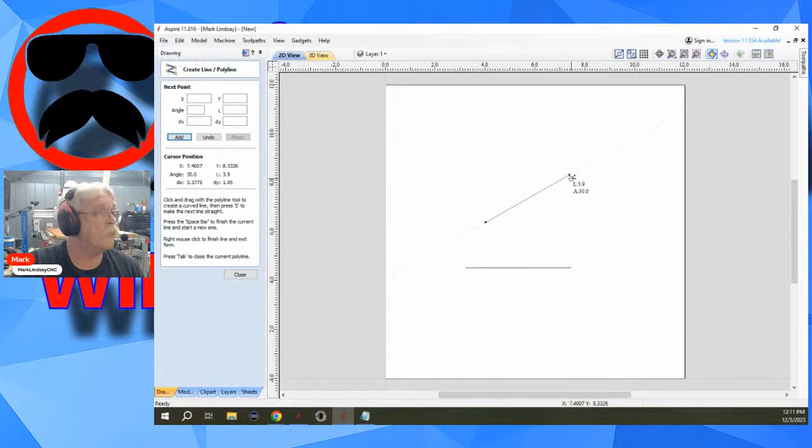Maybe it's something I'm not doing right, but I tried them identically in version 11.5 and version 11.0 and got the same result. So let's do, what did I say, 26 degrees - it's not urgent that I be right on 26. There's 26.4, close, and select that. Rotate - my rotation center stays the same, and I want an absolute rotation, 88.5. Apply - and again, it flips it.

It does a relative rotation. So I'm going to bring up both topics with Vectric, to see am I doing something wrong, or am I doing it backwards or something to that effect. So that was the gist of the follow-up, in that we weren't necessarily doing anything wrong - we just found a little bug under the hood. And so I'm going to try to get it taken care of.

I will update you when I get a reply. But again, I've got to make a short video - I just haven't gotten that far yet. It's been a busy 3-4 days. And as soon as I get an update from them, I will update you on possible causes and any fix that they come up with.

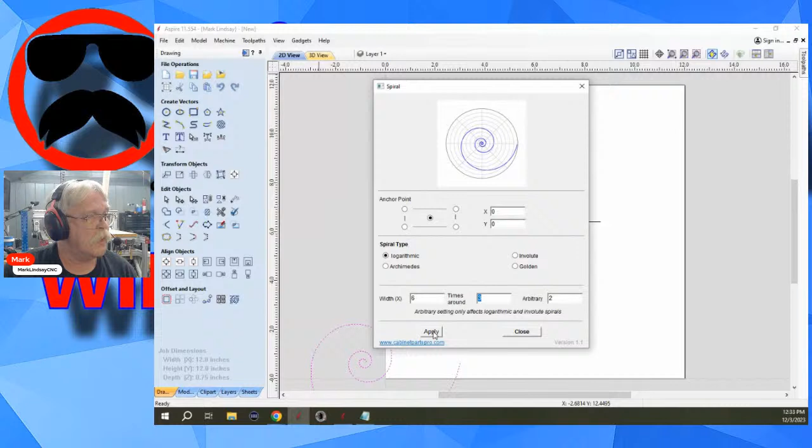But we'll go up here to the spiral gadget, and I'm going to create a logarithmic spiral. I'll leave this as it is, a 6-inch width wrapping 3 times around. We'll go ahead and apply, close that. Now I need to center that up on my material. So there we go. I have my logarithmic spiral with 3 wraps.

Now let's go into mirror, selected objects, and we want to flip about a line. So I'll have to hold down shift and select my line. And it's going to flip this spiral around the line. Let's see if we get weird results, Brooks. Nope, looks good to me. It worked. Looks good to me. Let me go ahead and select that, then we'll shift and flip it again. It seemed to work for me, Brooks.

I don't know what it is, but there have been times I have discovered in the last, I want to say, well, with version 11.5, I've noticed that certain things will suddenly stop working. But if I save the file and exit Aspire, then start it up again and load the file, everything works perfectly. I can't explain it. I don't know what's going on.

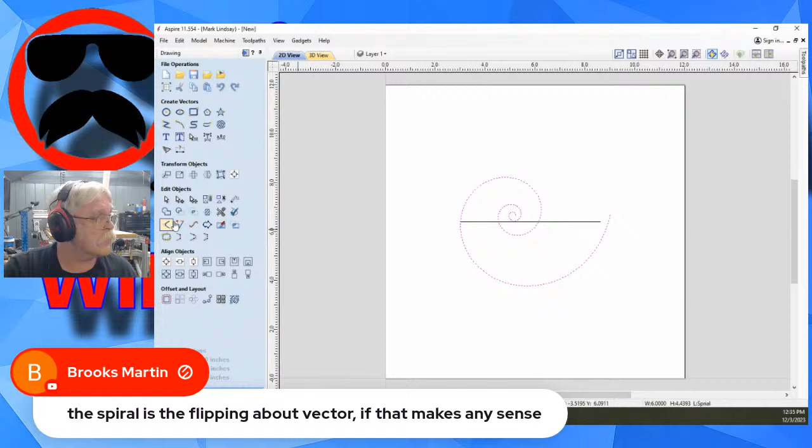Let's see, Brooks says the spiral is flipping about vector, if that makes any sense. It doesn't, sorry. The spiral, it worked for me. Well, let's get into the mirror. Now you said the spiral - do you mean the spiral isn't flipping about the vector? This is going to go vertical because my vector is horizontal. So if I hold down shift and select that vector, watch the center of the spiral here. It's going to flip about the line. The bottom of the spiral is right there.

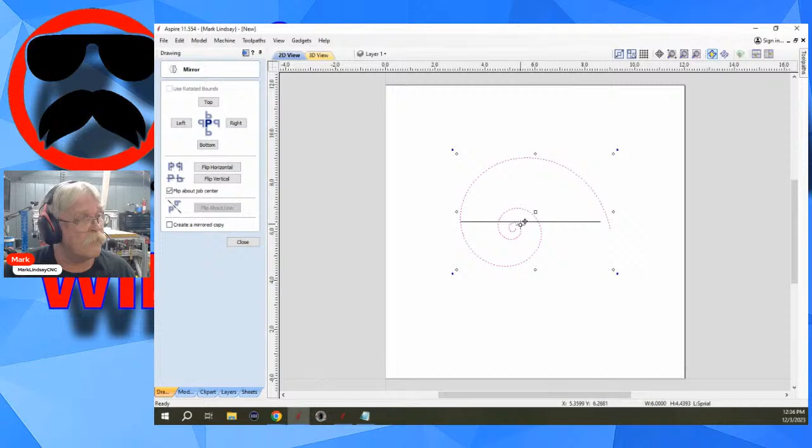Oh, it's flipping the straight line to mirror around the spiral.

What is your vector selection order? That matters big time. Let me close this. You have to select the spiral - that's what you want to flip. Then you have to hold down shift and select the vector

that you wanted to flip around. It's kind of like using a 2-rail sweep or extrude along a single line. You select, but it's backwards from that. You have to select the thing you want to flip, then select the thing you want it to flip about. Now, if you select the vector first, then select the spiral,

it is going to move the vector. But if that's not what you intended, if you wanted to flip the spiral around the vector, Control Z - you have to select the thing you want to flip, then select the thing you want it to flip about.

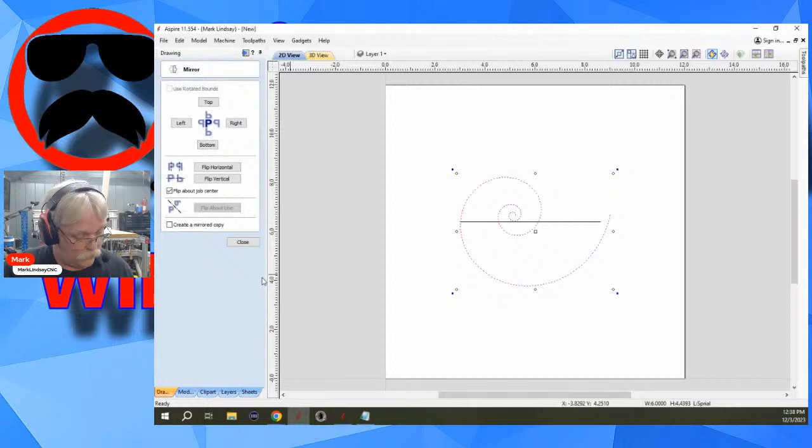It appears to me that it's working just fine. This vector is staying put. I can't say what's happening with yours, but

now, if you just want a copy, you don't need to use the vector. You can just flip about Job Center and create a copy.

But the tool is doing what it's supposed to be doing. I've been talking about my last demo.

The vector to mirror is a scalloped line around the spiral. Okay, I'm going to have to see the file. You're going to have to send me the file, Brooks. You're attempting to model a seashell. This is not something that I can do right now with you in the chat. You're going to have to send me the file and we're going to have to talk about it so I can see what's going on.

I see what you're doing. I see where you're going. You're attempting to model a seashell.

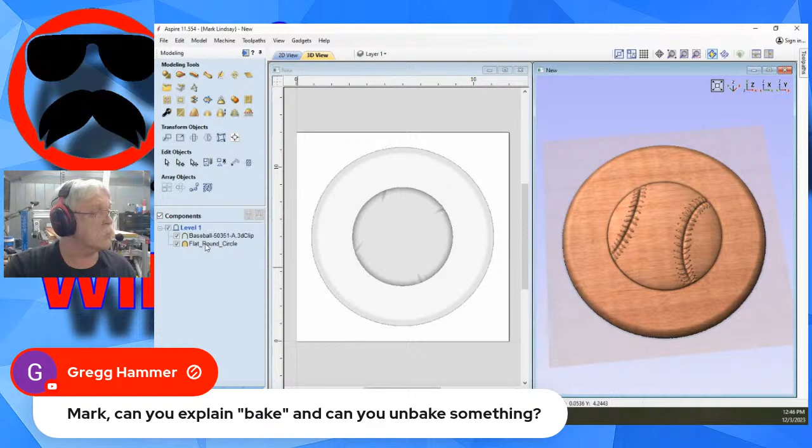Go into my modeling tab, and I'm going to split my 2D and 3D views. Now I've added my baseball on top of my flat round circle. Baking will take these two separate components and turn them into one single component. Let's select both, hold down shift, and go right up here to bake the selected components into a single new component. We click, and now that is one single component.

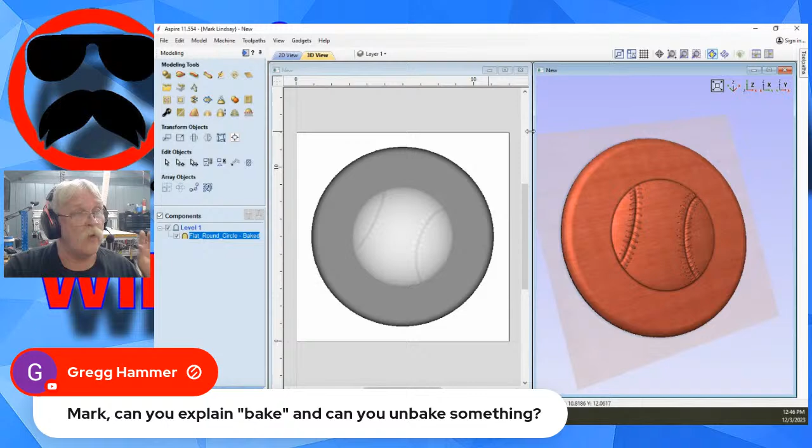Once you bake them, can you unbake them? Well, let's try. If you have it set up, you haven't saved it, you haven't closed the file, and you're still within the window of Control Z, it does work.

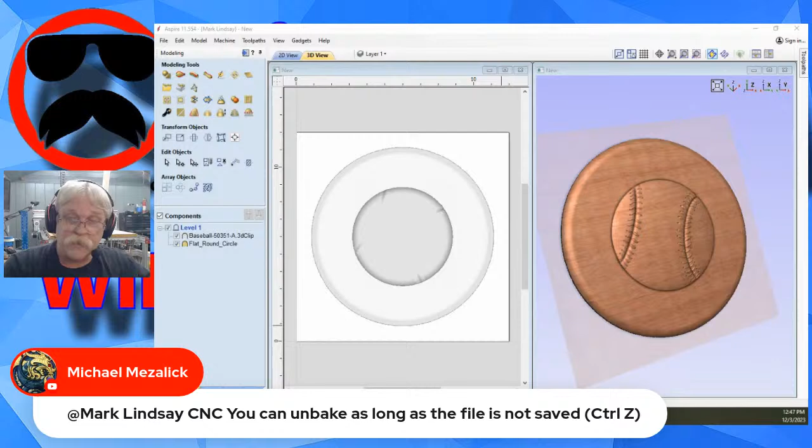And that's where Michael, see, you taught me well, Michael. You can unbake as long as the file isn't saved. But if you have saved it and gone on, it cannot be unbaked. I think I know what you're talking about. I got your email, I will get back with you just as quick as I can on that.

No, once it's baked and it is saved and you've moved on, it can't be unbaked.

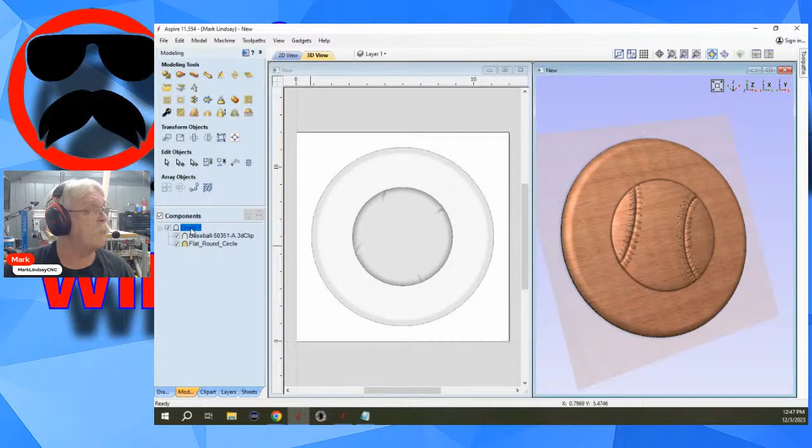What you can do, however, and this is what we probably should have done, come up here to the level, insert new level, then copy these to that new level. We'll hold down Control, drag them up. That's not going to work, is it? Or maybe it's taking a while. Nope, it did work, okay?

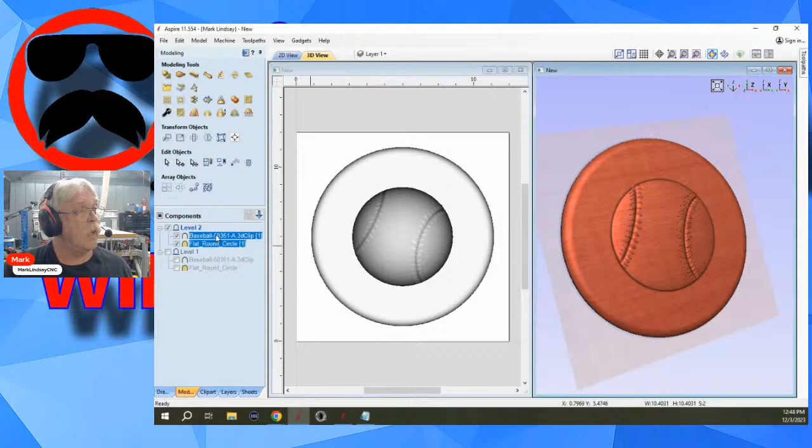I'm going to shut off the first level, and now I'm going to bake these two. So that's one. Whoops, didn't mean to do that. Control Z, undo that move. So now this is one component.

So now that's one component. If I turn that level off, turn this level on, make it active, these are still two separate components.

The thing to remember, though, Greg, is that if you have done this, don't leave both levels turned on, because that's going to cause you no end of problems. So turn one level off, make sure your other level is your active level, then you're okay.

Yes, technically that's not an unbake, it's an undo. The result is the same.

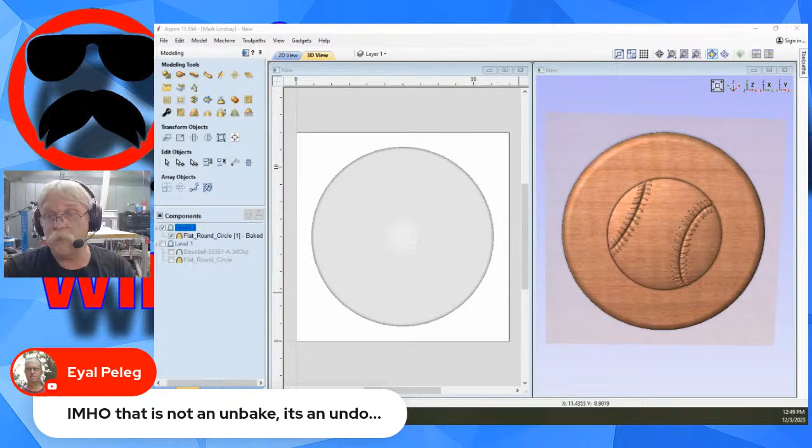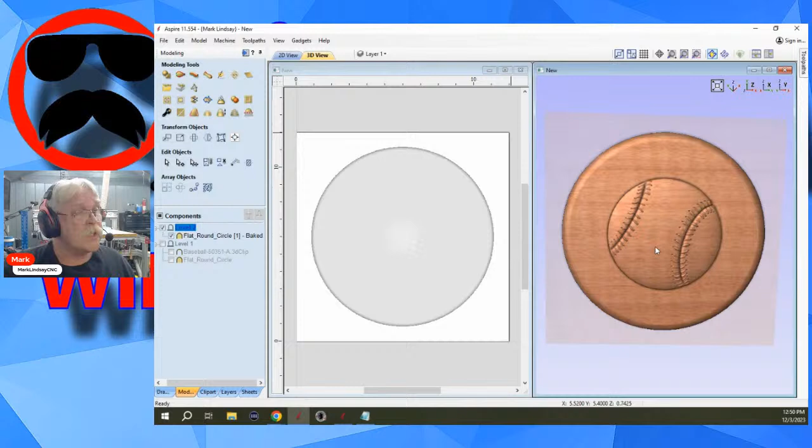Let's see here. Yeah, basically that's it. It is an undo, you're right, but the effect is the same, the result is the same. It will unbake, because there are certain things that you can do in the software that can't be undone even with a Control Z.

So, I just wasn't sure if this was one of them. So,

yeah, Greg, I will try to get that to you this afternoon. But again, I've got a commitment, I'm going to have to leave. I've got a commitment this afternoon I cannot miss. So otherwise, I will do my best.

Let's see here. Chris Greaves wants to know, does anyone do picture mats on the CNC? What type of mat? I'm not sure what you're trying to do. If you mean photo, there is a way to do photos.

I've not done them myself, so I'm not the expert at that. Let me get here. So if you have more information on what you're talking about, as far as picture mats is concerned.